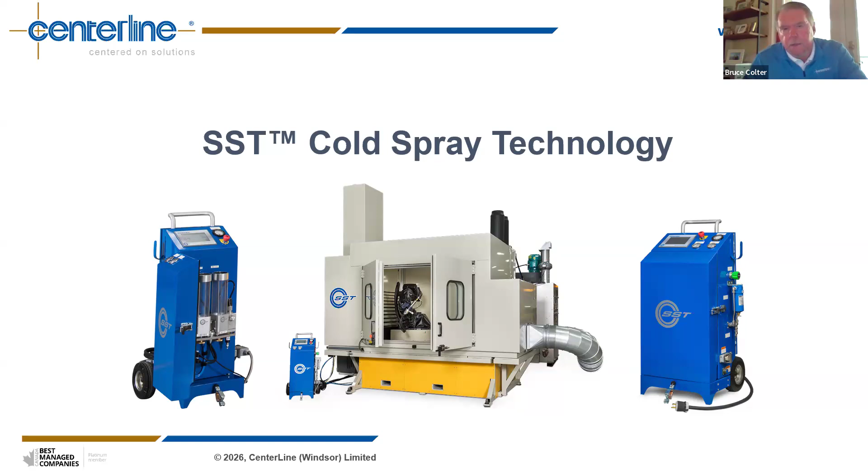Cold spray has been around for 30 or 40 years, but Centerline SST has perfected two key components of the process: the spray gun, specifically our downstream injection nozzle technology, and our unique gas and powder delivery system. Our powder feeder is the best technology on the market today. These unique capabilities provide quick heat up time so you can get to work quickly and dramatically reduce clogging.

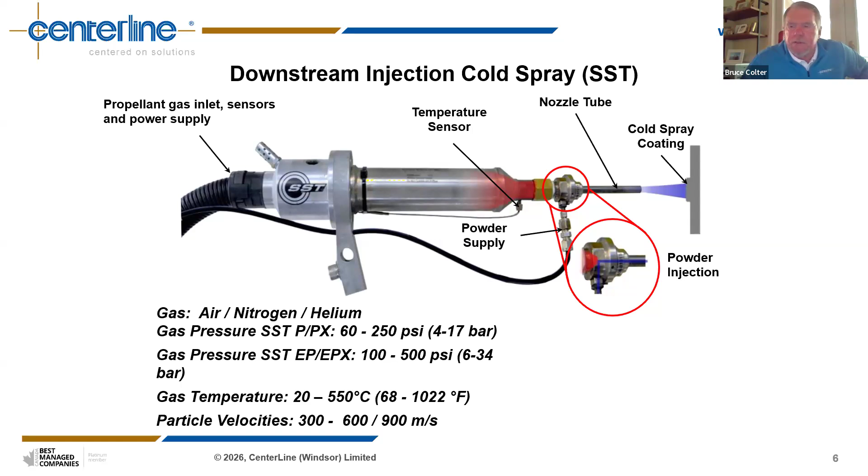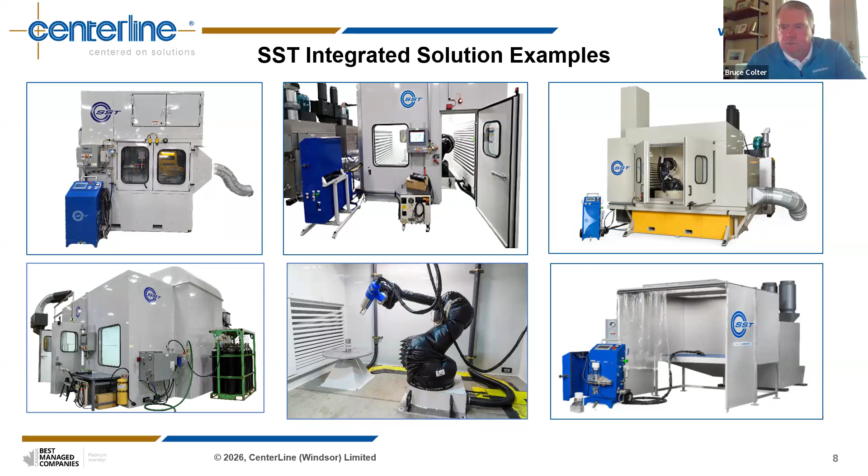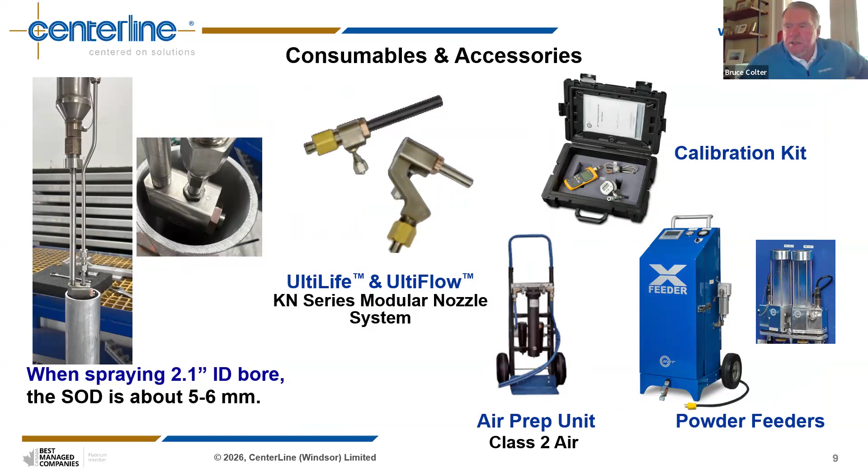SST provides innovative and high-quality consumables and accessories, like the smallest ID bore spray gun under 2 inches, modular nozzle systems, calibration kits, and our best-in-class powder feeders.

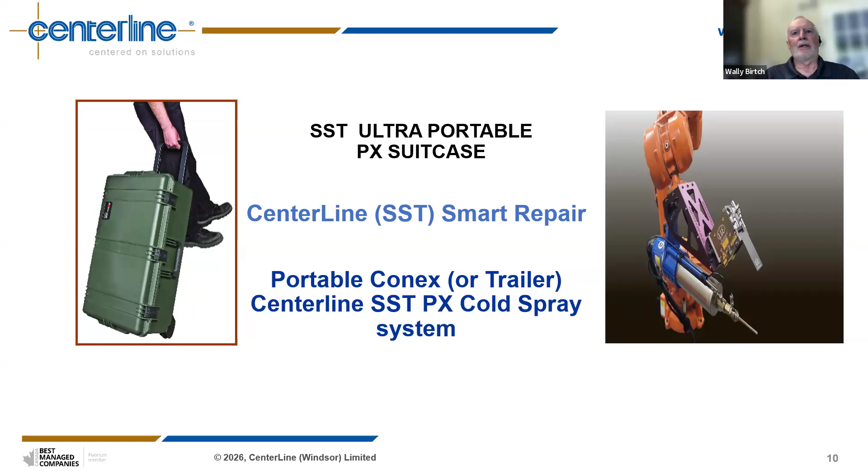Back in 2007, we did a suitcase version of this. Had some customers looking at this for repairing IVD aluminum repairs on landing gear, so it would be a repair on wing. But the project never went to fruition because it ran out of money for doing fatigue testing. So we basically dropped the project at that point because there was no further interest.

So we continued on with just our standard PX. Next slide.

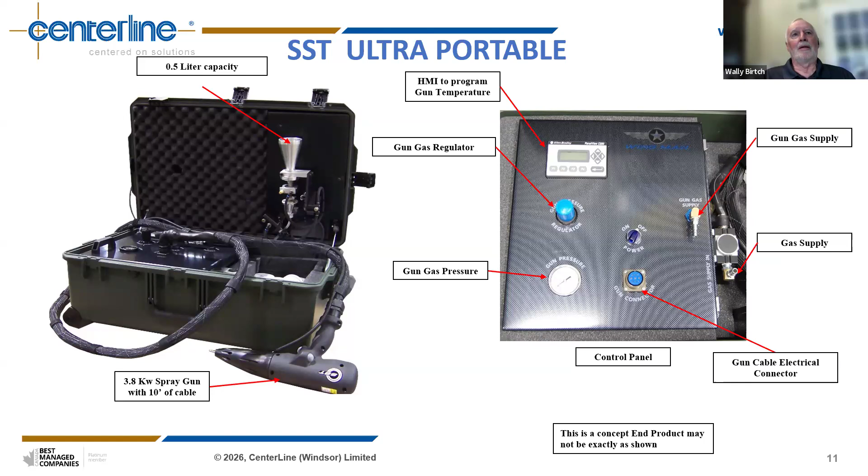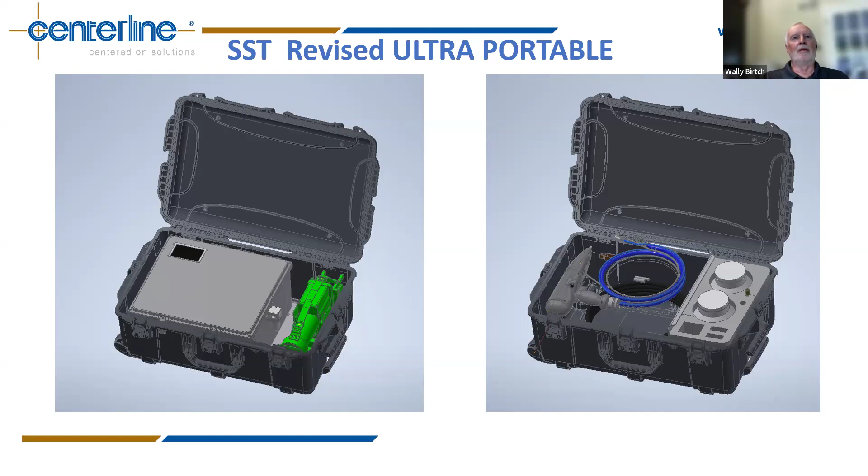So still very movable. Next slide.

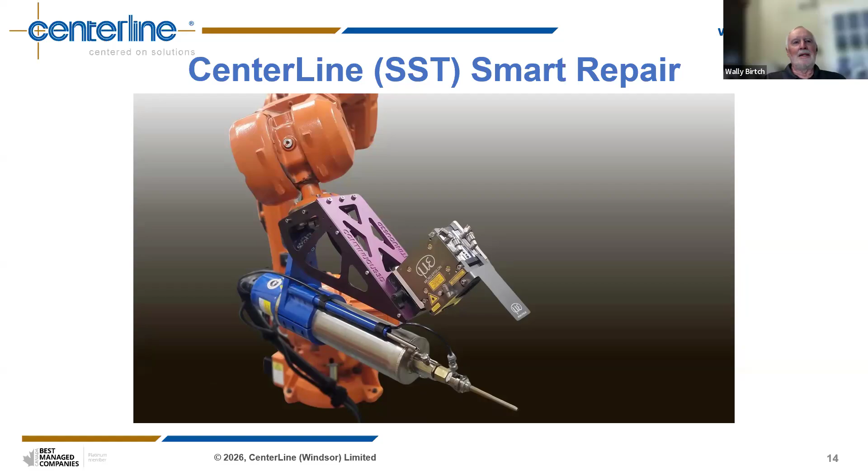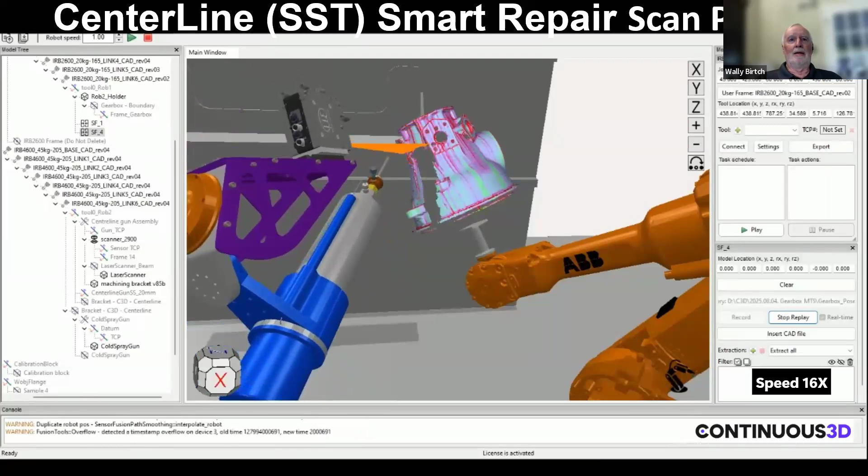So this slide is showing, well, back up one, we can get the video going. Okay, so what we're doing here is we're scanning the part. It's set up that we've used two robots in this place because we had two robots available and we didn't have a turntable available. So we used one robot to simulate a turntable using only two axes of it. So what we're doing here is scanning the part every 20 degrees, rotating the part and scanning over that system again.

So it'll rotate around here for the full part, producing a point cloud, which we transfer into a CAD model. Once we've got that totally scanned, which generally takes about 20 minutes to scan this part, in reality we've sped this up quite a bit for just a video short time.

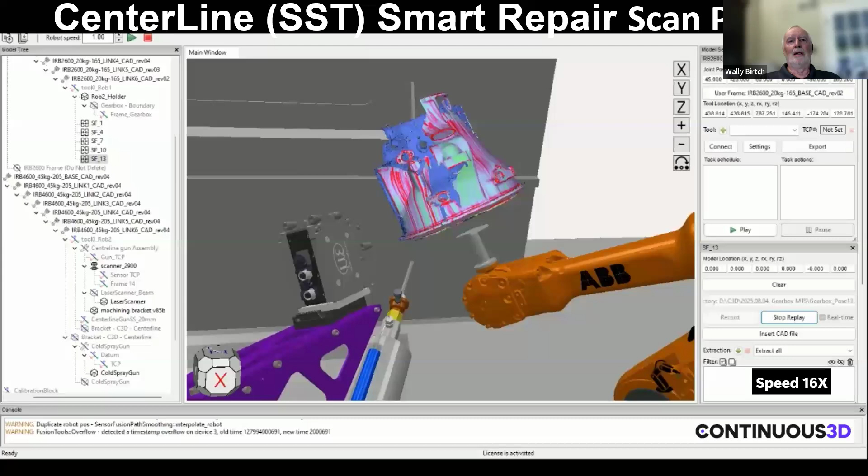So when we're complete here, we will be able to select certain areas, or we could compare this to a CAD model if there was one available, to see if there's any differences between the CAD model and the part. But generally we know what areas need to be repaired, so we will probably go directly to that.

We'll just let this run out till it's finished, and we'll progress to the next slide.

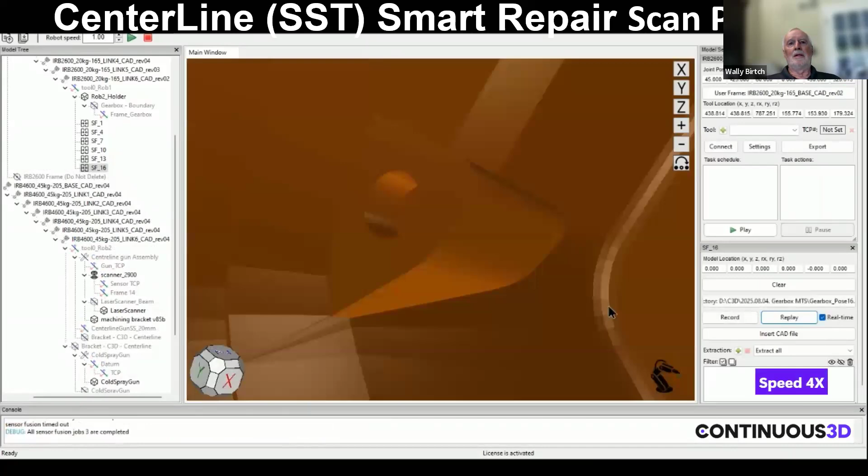So we've got a completed model now. There are some holes in it. I mean, we could go back and do some different angles to get more features, but generally the flanges that we were interested in are already scanned in and look very good. So we're not going to spend much time going back and replacing all those vacant holes. Next slide.

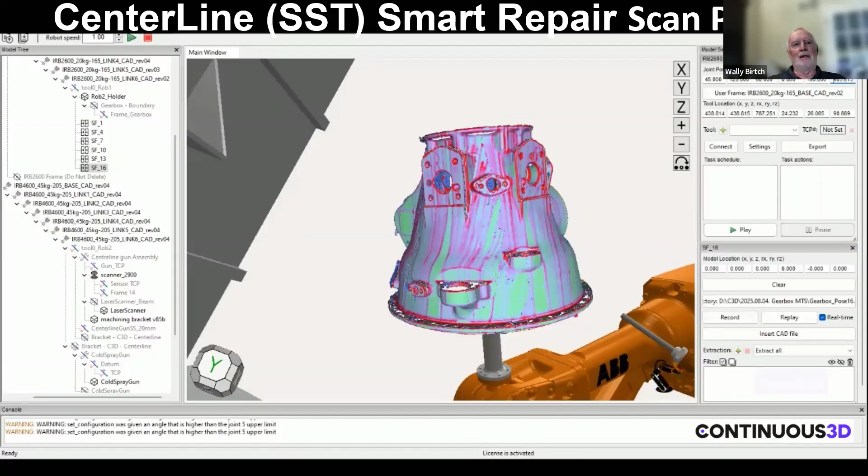So in this slide, we've actually taken the point cloud and put it into CAD, and now we've already generated a toolpath, and it's going in to spray that area that needs to be repaired. So in this case, we were spraying aluminum oxide mixture onto a magnesium casting. This particular product took about 2.5 minutes to spray, and we used 33 grams of powder to spray up that flange, and then it'll be ready for remachining and bringing it back to spec.

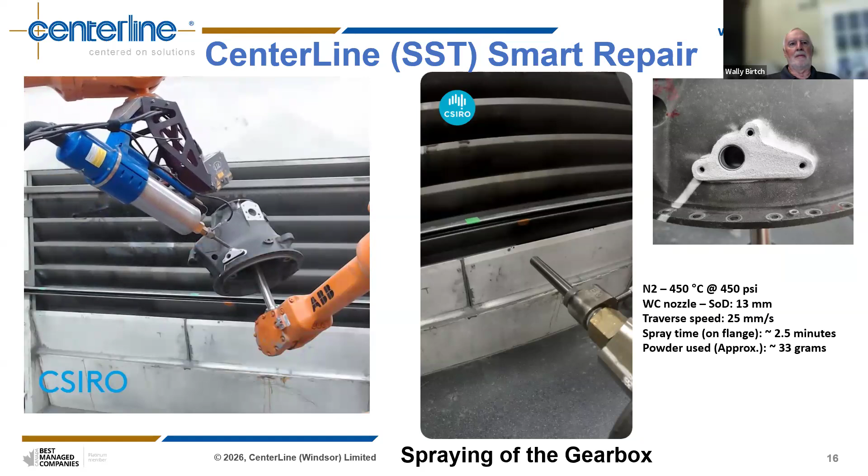Bruce, can you click on the center? Yeah, okay, it went automatic. Okay, yep.

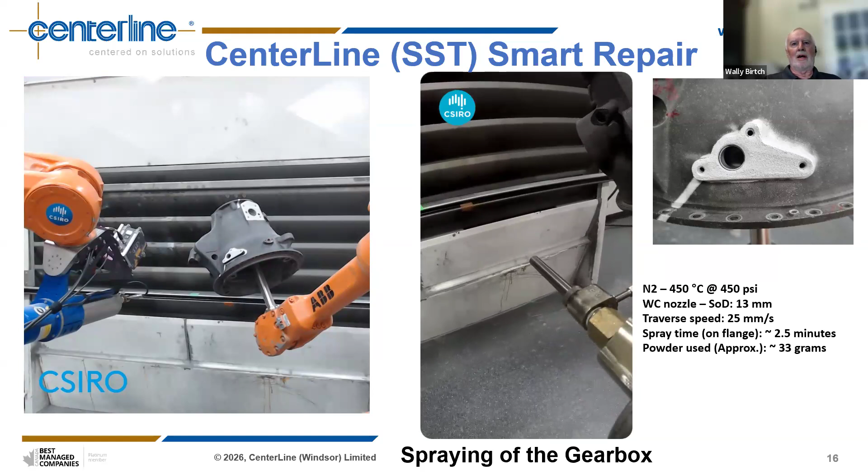This is just a close-up of this same spray, but we'll speed it up a little bit. This whole toolpath was generated automatically from the continuous 3D software, so there's no programming required by a robot programmer to do this toolpath.

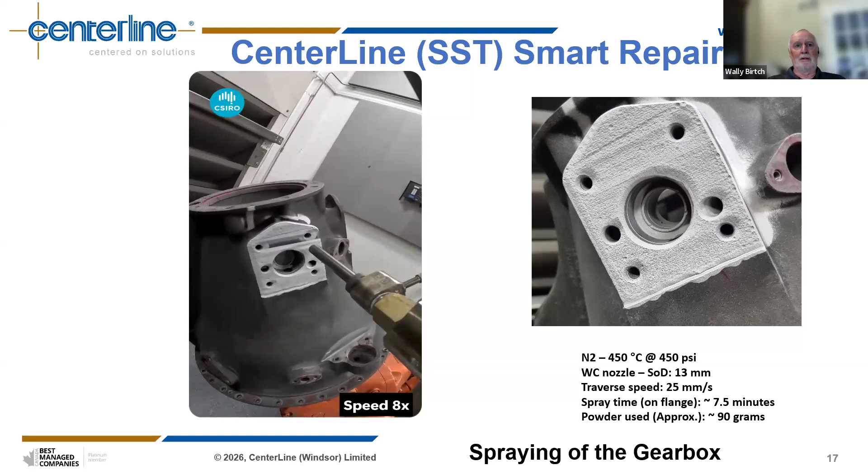Next slide. So it's a little bit larger flange we're looking at here. We would normally put a mask on there instead of dragging the spray across the part, but in this case we were doing experimental stuff and developing programs, so we didn't bother with masks since this was a scrap part anyway. From the time we started scanning to having the program written and spraying took about 2.5 hours total, which is phenomenal compared to bringing in that model and writing a program manually, even offline, which would take much longer than 2.5 hours. You'd be looking at probably a couple of days of programming to do that similar toolpath.

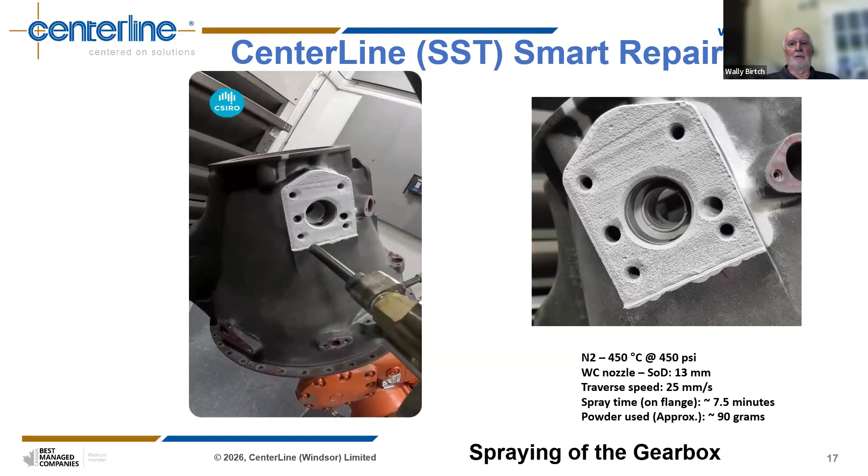So in this case, this part took 7.5 minutes and we used 90 grams of material. We were running at a traverse speed of about 25 millimeters per second, again using aluminum oxide composition for the powder.

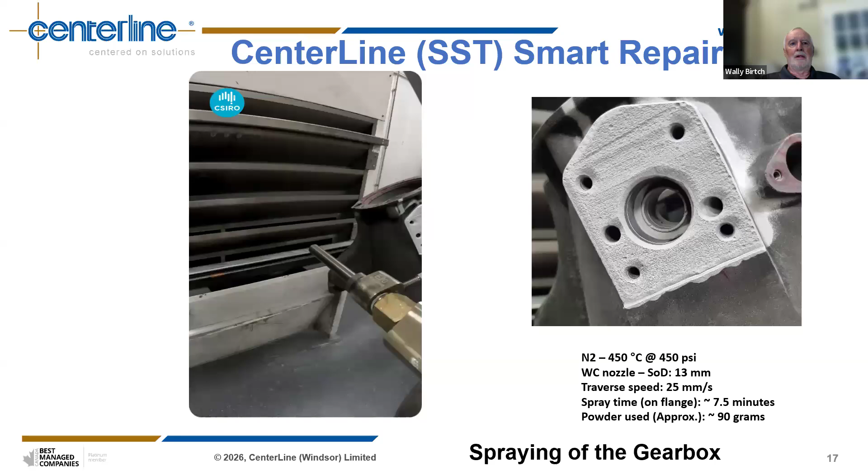So the next slide here, we were looking at repairing holes in aircraft panels that have chamfers on them. We had seen a number of panels with oblong holes where the rivets or fasteners had been moving, elongating the holes. So we were looking at developing a process to scan the part, figure out where the holes are in the panel, and then write a program to fill those chamfers in, remachine them, and get back to the correct dimensions.

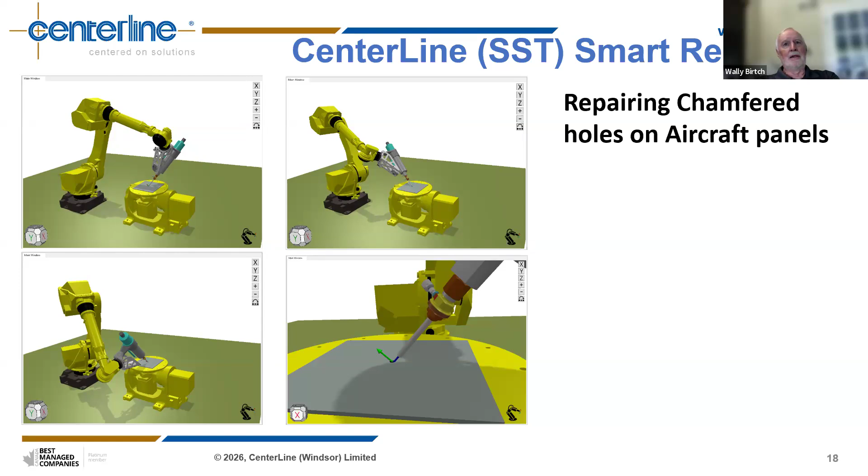Next slide. So in the panels we were looking at, we just took some 5083 plate, bored some holes, did some chamfers, and ran simulations. We were going to use that as our test program for developing the process.

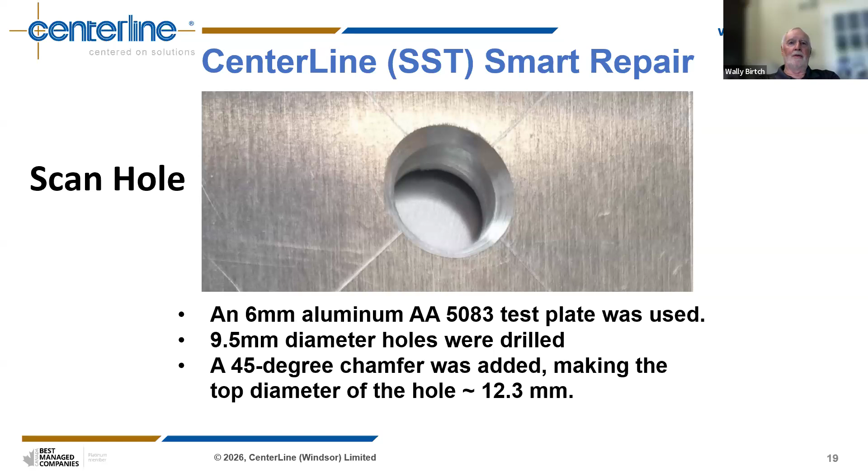Next slide. So when we analyzed that and came up with a toolpath, it was a 3-spiral path that was generated to fill in that chamfer and hole. Next slide.

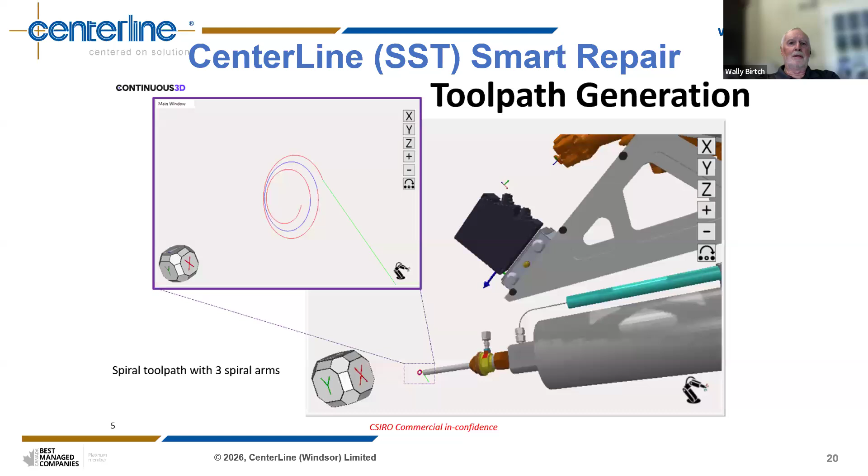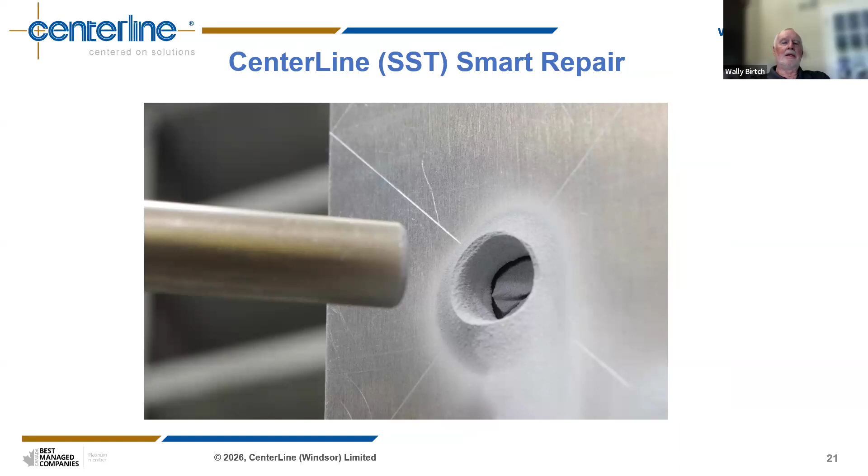And that was the end result, where we did that 3-spiral, filling in that chamfer, and now it's ready for remachining and re-chamfering to get the hole back to dimensions. I thank you.